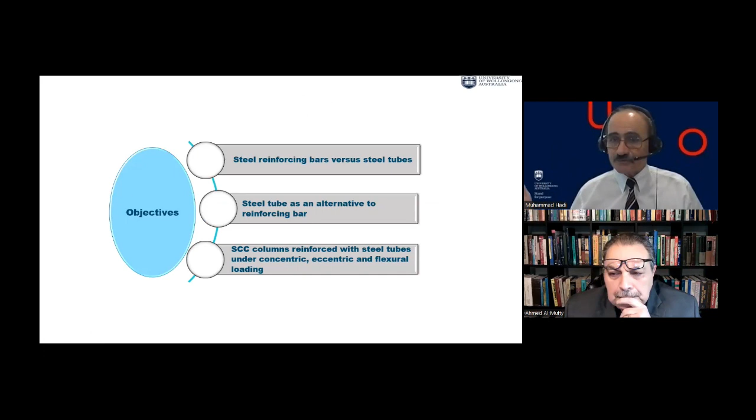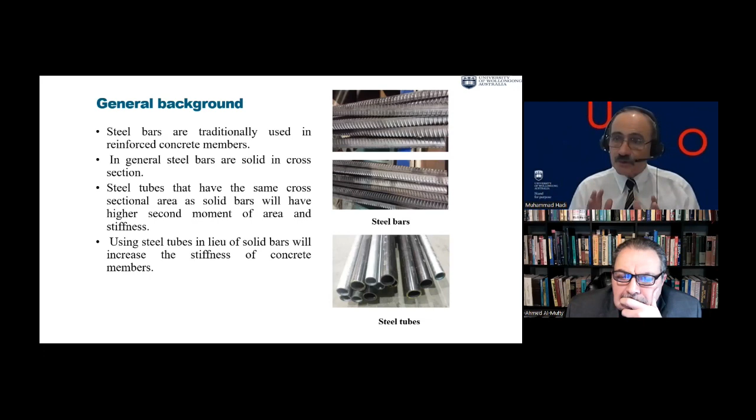Don't worry about the objective. It is using a different type of reinforcement, to see whether it works or not. I don't want to bore you with these details. We have been using reinforcing bars, in tension and compression, for more than 100 years. But the idea here is to use these tubes. Why? The concrete will be confined concrete. When you have confined concrete, you will have better properties: the compressive strength will be higher, and the ductility will be higher. So this is the idea we are relying on.

Now, self-compacting concrete was started about 40 years ago in Japan. So what is the idea? You just put the concrete, no vibration, no compaction. You just put concrete and it flows, and then you leave it for whatever, 28 days, and that's it. So this is self-compacting concrete.

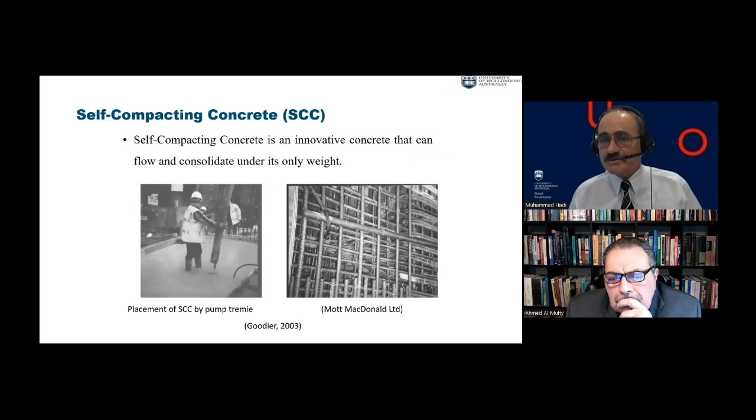And the idea is we will have confinement. I'm not going to bore you with details, but in general, we have ties or helix. Americans call it spirals. It's the same thing, but a spiral, from an English point of view, has a diameter that gets smaller, so helix is the proper term. As you reduce the spacing, the confinement increases, and you will have better behavior in concrete. Is the helical reinforcement also made of pipes? No. So what makes the concrete self-compacting? I will come to that. I'll show you the mix design.

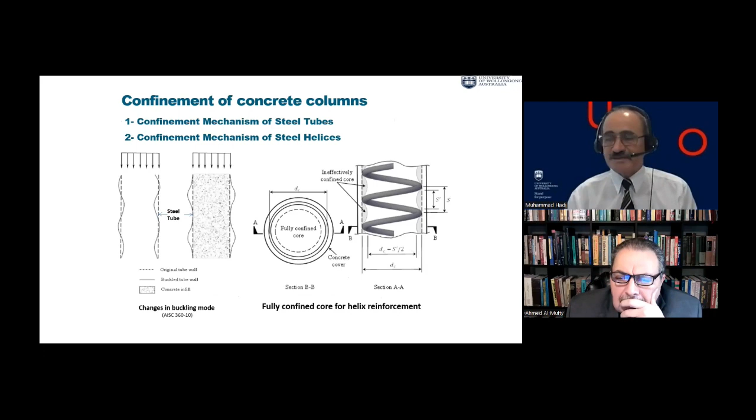Before we start, we do preliminary testing. This includes all materials, meaning the steel. We do all testing based on Australian standard. If there isn't one, we go to ASTM, Canadian or European standards. If there is a standard, you have to follow those criteria for all materials.

This is nominal 500 MPa for the deformed steel, 12 millimeter and 16 millimeters. For the steel tubes, they are 350.

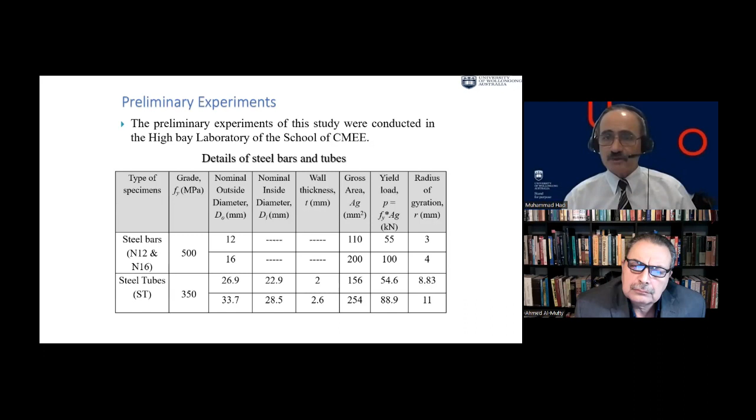So we came up with this idea. How can we come up with this? Again, I don't want to bore you with numbers, I want to tell you about the concept. So we said, okay, let's see what tests we can do on those materials. I will start with the lower two rows.

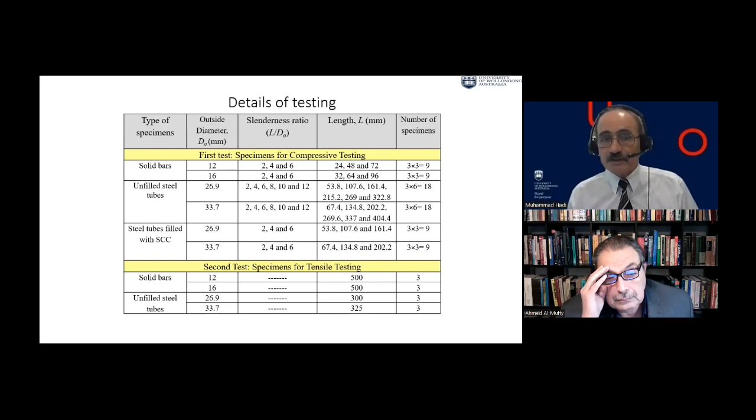These are tension tests - 12 millimeter, 16 millimeter bars for the steel bars. Then compression - for the solid bars, and then for the tubes, both empty and filled with self-compacting concrete.

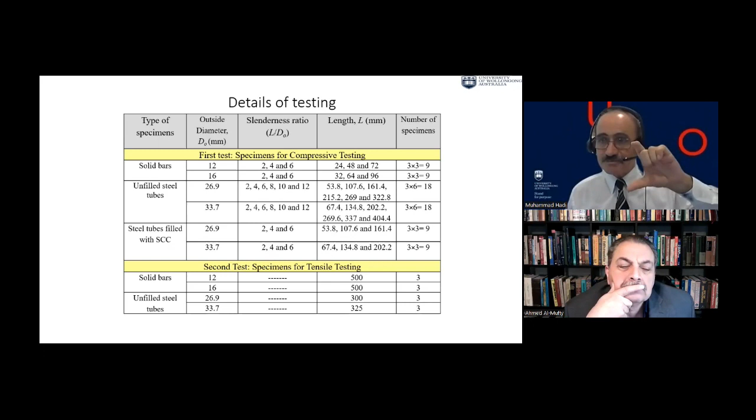Now, in tension there is no problem, you have one length. Whereas in compression there is the problem of buckling, pi squared EI over L squared. Because of this problem, we had different L by D ratios - length to diameter ratio - to see the effect, and we did those empty and full.

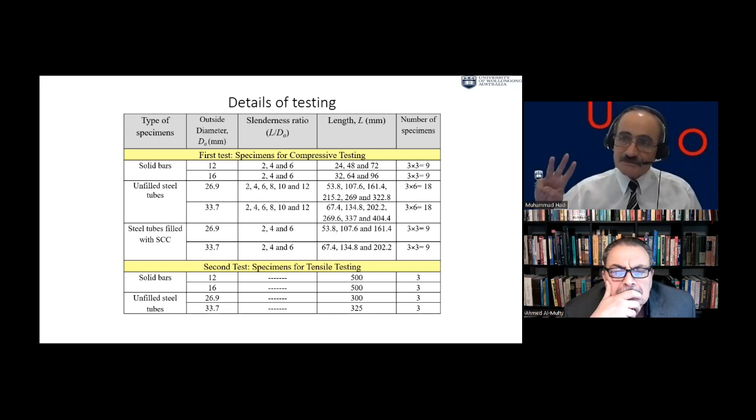So you can see in this preliminary testing the size of the test - maybe 70, 80 tests, and of course we repeat everything 3 times to get the average. So this is the idea.

Now let's go back to self-compacting concrete. In self-compacting concrete, cement is not more - we added some minerals, fly ash and the like. The main thing is the coarse aggregate is small, whereas fine aggregate is large. Coarse aggregate, 10 millimeter maximum - this is what we use because of the size of our samples. Then we had some high range water reducer.

What is that water reducer? High range water reducer, like super plasticizers. We buy them off the shelf.

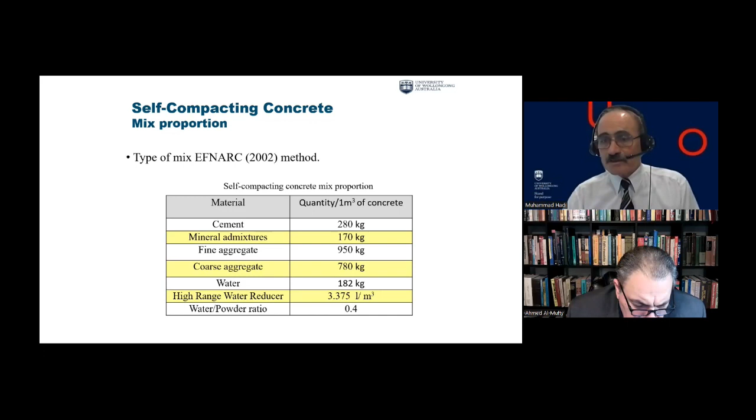So we bought all those, and now you can easily say this is self-compacting concrete. Then I said, okay, what is self-compacting concrete? We haven't started the main testing yet - we are talking about the basics, the materials. How do you know this material is self-compacting concrete?

There is the slump flow test. We put this, leave it, and read the diameter to see the slump flow of the material.

This is easy, but there is more. Why is the slump cone reversed, upside down? The self-compacting concrete slump is like this, not bigger to smaller - it is this way. And there we measure the height, right? With the slump we measure the height, whereas the usual slump measures how much reduction happens in height. Whereas this one is the flow.

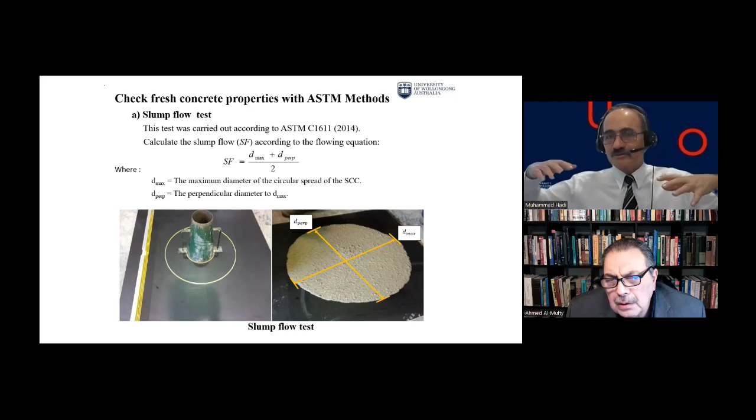So it will flow, we read the diameter. We leave it, and then we read. So this is one test.

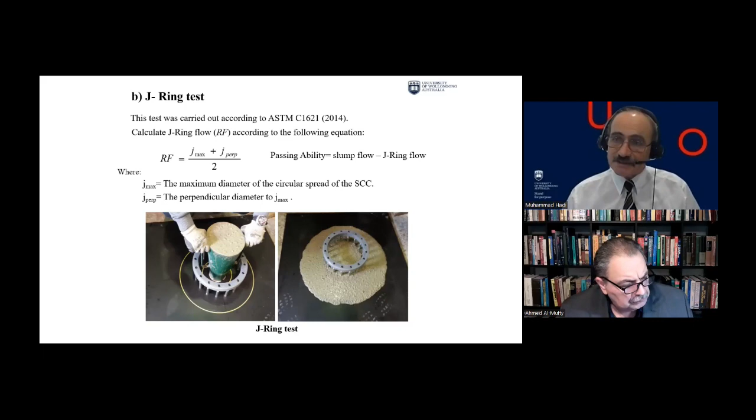The second test - now I will show you. You can see this J-ring. This is what we built, we didn't buy it. We built this from steel, and we put this jig and this J-ring with pins at their diameter, then we leave it and read the diameter to see the passing ability. So this is the second test, to confirm we have self-compacting concrete.

And the third one is column segregation. Again, it is based on ASTM.

Do you use slag like GGBS? We use slag, yes. Normally if you go to shops, there is always fly ash and slag.

Do you do special trials for different percentages to know setting time, strength? Yes, you have guides already for designing? Yes, can I get back to you later on this particular one? But don't forget it. No, I will not.

Okay, I'm interested to show people what self-compacting concrete is and how we deal with it.

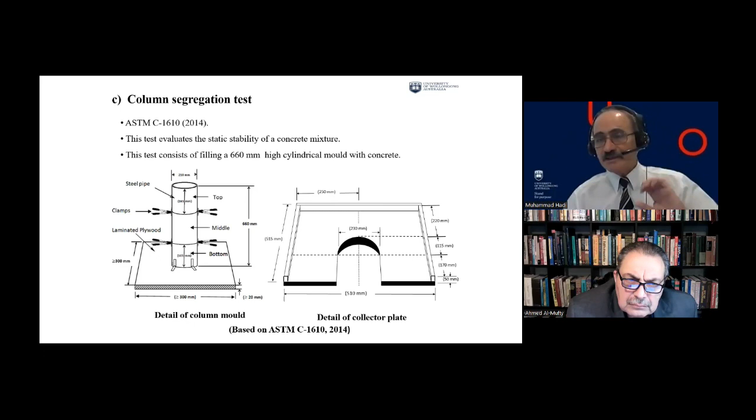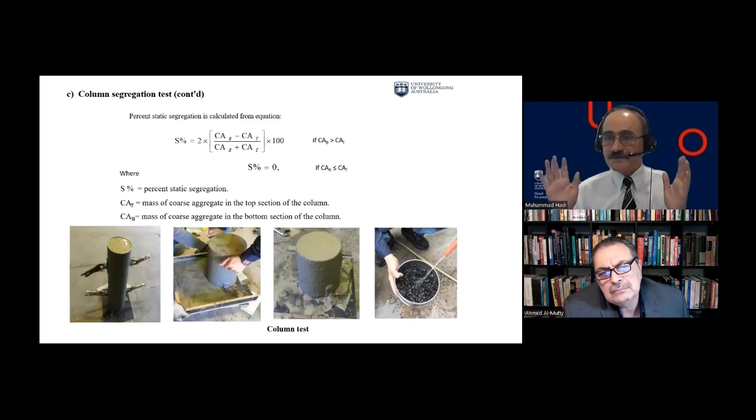So for the self-compacting concrete, this was the mix design. Then we did the slump flow, we did the J-ring, and this is the last test to see the column segregation - again, what we built. This is the work of one PhD student, before starting his work. He did all these tests, and then the segregation test, to confirm it is passing, that it is self-compacting concrete.

So we finished this one. Then we have the compression test. This is normal - we use small cylinders, 100 mil by 200. Why do you use small ones?

Australian standard says 100, or we can use 150. Is it related to the size of the aggregate in some way? No, it is about handling - less material and handling, lighter in weight. So usually in Australia, we use the 100 mil.

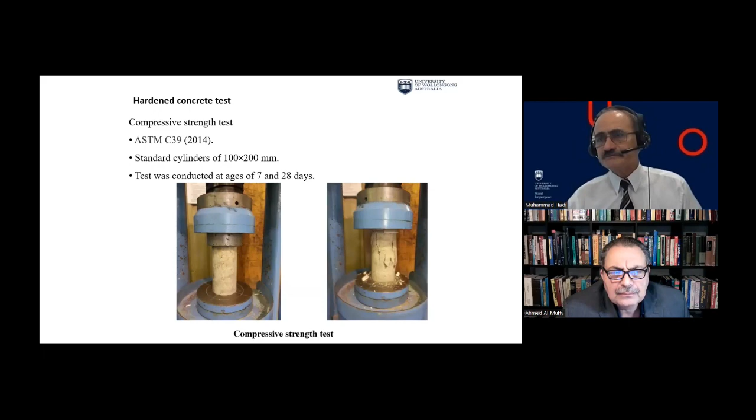Okay, so all this is normal. For the steel bars, what we did, there is something called an extensometer, like a strain gauge. We attach it to the top and bottom. Its length is just over 100 mil, it's in inches, so 101.6 mil. This green part is connected to a data taker, and then it goes to the computer, which gives us the load from the machine - the compression or tension machine - and the elongation for this gauge length, giving us the change in length.

And we can determine the strain. Usually these kind of measurement tools, whether strain gauges or similar, as long as they are checking or recording the change in resistivity, I think we should calibrate them before usage. You are 100% right, yeah.

The first thing I liked in your comment is you said resistivity. Of course, as engineers, when I first used a strain gauge, I asked - what is a strain gauge, what does it do? There is V equals IR, where V is the voltage, I is the current, R is the resistance. But if the length increases, V is constant, I will change - it decreases, and the resistivity increases.

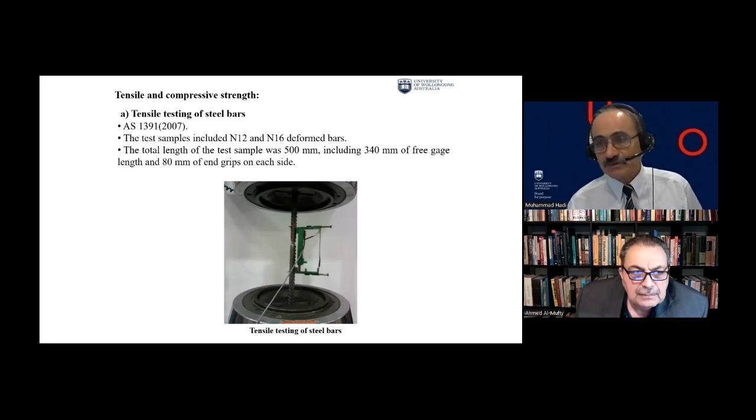So doctor, this photograph shows 2 meters? No, this is only less than half a meter. Okay, but can this machine go longer? Yeah, you can have longer pieces. Now when it comes to bars, it's easy, but when it comes to tubes, if you grip the tube, it will collapse.

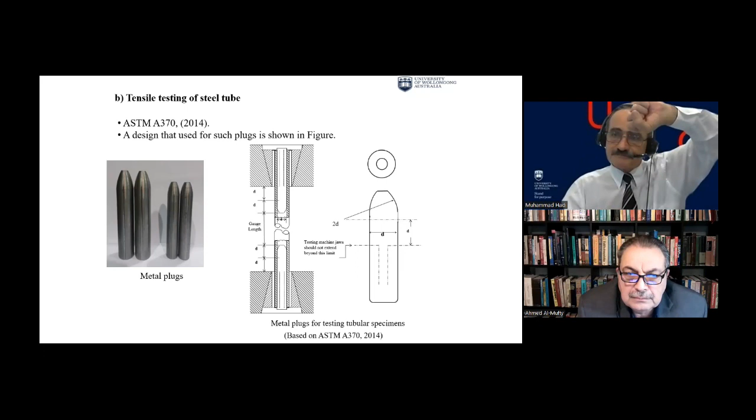So then we went to ASTM, and on the left-hand side you have the metal plugs. We built the metal plugs - we used the lathe and created all those metal plugs. The idea is we put one metal plug at the top, one at the bottom, and then we grip them and test them. It will strengthen the tube at the top and bottom, but in the middle you keep it empty so you get the normal stress-strain relation for the pipe itself. Correct, yeah.

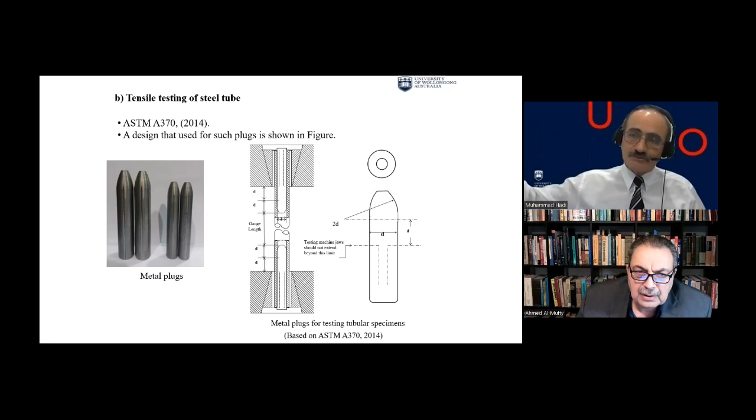So you can see the amount of work the student is doing for this. For compression, it was easy - we tested them in compression at different lengths. You're talking about the pipes? Pipes, okay, compression. No, the first photo on the left-hand side is the steel bar. Oh yeah, that one is for steel bars, yes. Then the second one is steel tubes, and the third one is steel tube filled with concrete in compression.

So this is the steel bars - we put them in compression. That was easy, and you can see, I love buckling.

This is what I teach buckling in second year. I like when you say, I love buckling. I don't love any failure. Well, the worst type of failure is buckling. The second worst. But that's the way we learn, from failure we learn what to do.

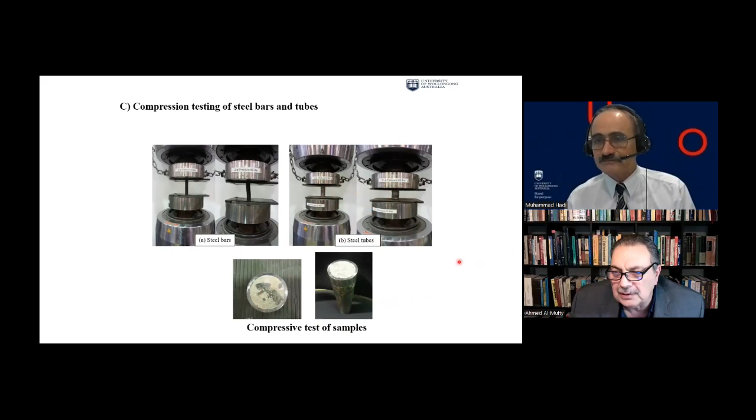You can see here, they call it elephant foot, when the metal starts crumbling - metal elephant foot. So here we tested those in steel tubes, empty, and we did them infilled with concrete. Actually, you will not have that elephant foot when it is filled, right? Correct, yes.

And these are some results. Again, the focus is on the amount of work one PhD student is doing. Remember, all this is preliminary testing. So most of these tests, Faz did them, up to now, and I'll show you more. So this is for tension, for specimens. These are already published.

Now here you can see we are comparing the N12, which is the deformed bar, with the 26.9 tubes. This N is referring to an Australian standard? N refers to deformed bar, but an Australian standard, with nominal tensile strength of 500 MPa.

The N is... you know, we use phi for diameter. We use the capital letter T for diameter, especially in UAE and Saudi Arabia. In Iraq and some other places we use phi, maybe in India too, I'm not sure. In the US we use numbers, so there's a crosshatch for the number of the bars.

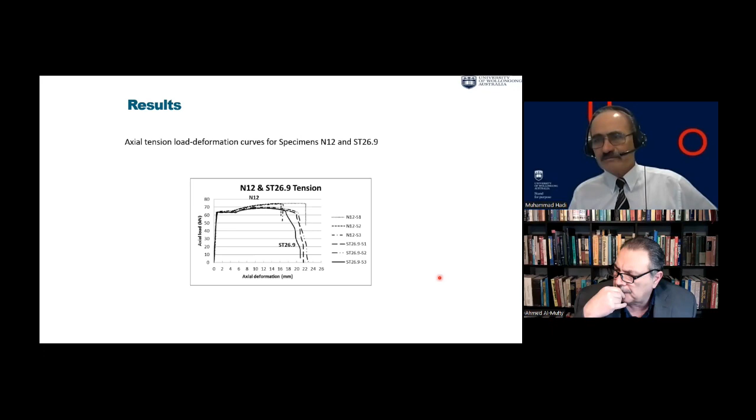So it's not a simple thing to get a specific strength and a specific ductility. Mainly it is the carbon, then other things like copper, nickel, oxides maybe. But manufacturers get used to it because after testing they know the values of the yield strength, which comes with the steel mill, the manufacturer.

But I have to say that for the last 30 years, I'm testing all the steel bars, and always they are above 500, which is good. In more ductile steel, I think you will find the ultimate strength is a long way after the yield - that gives the ductility its meaning.

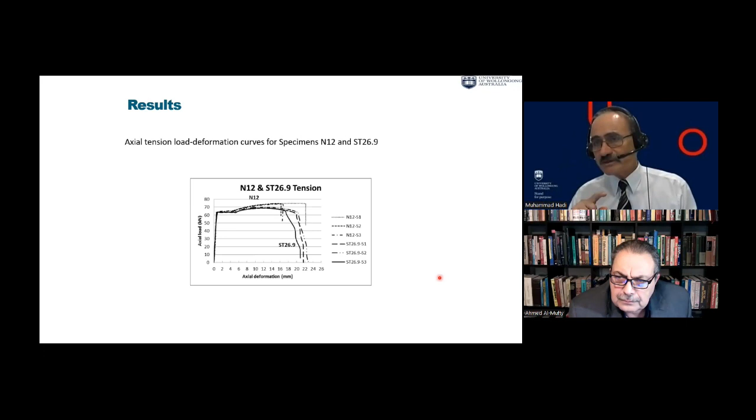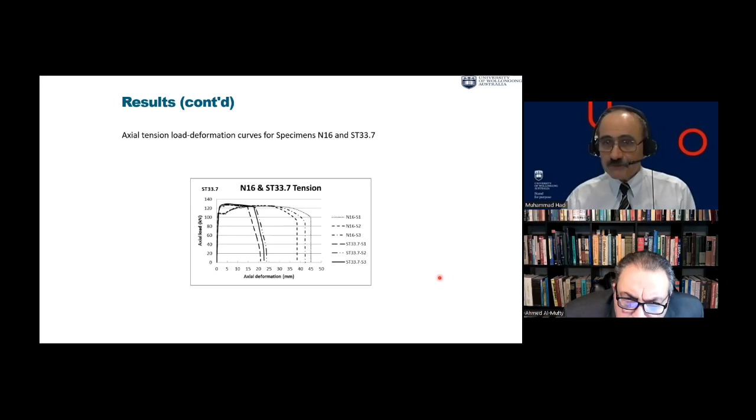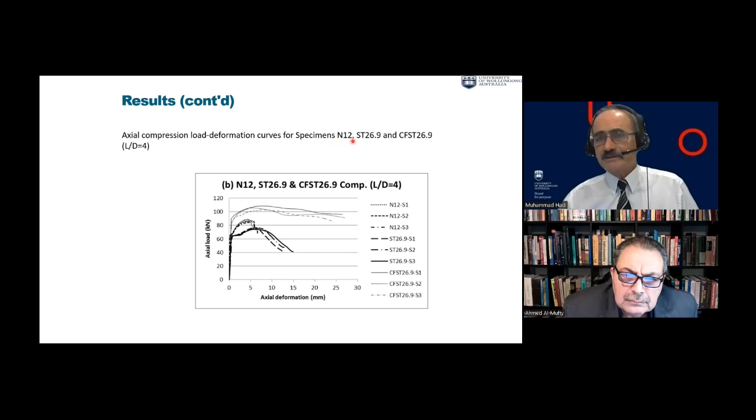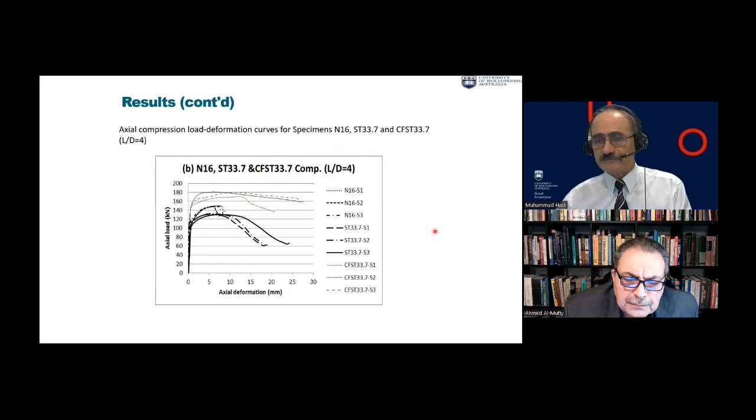Then we continued with testing for the other, bigger specimens. These are also compression tests. This is for, well I don't want to bore you, but it is obvious that as we increase the L/D ratio, we will have less strength. So this is L/D 12, which is this one.

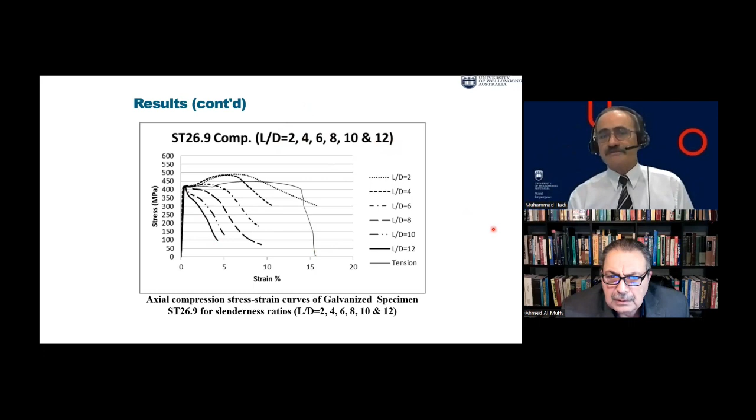You have much less strength. You made compression tests on length to diameter ratio of 12, starting from 2. This usually cannot stand for concrete, but because there's steel this way, this is only steel filled with concrete, steel may hold such length to diameter ratios. Correct. And remember, this is 33 or 26, so it is only about 1 inch, the old system.

So all this I've been talking about is the preliminary testing that Faiz did in preparation. He did all the self-compacting concrete, identified his materials, built the self-compacting concrete testing setup, and built the plugs for tension and compression. So this is the amount of work before starting the PhD testing.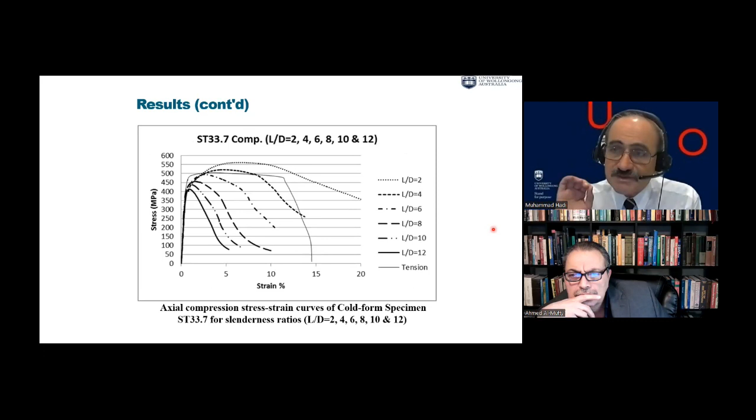Now the testing, Professor, how about the thickness of the pipes? How much is that thickness? The thickness is not much, it is 2-3 millimeters.

Okay, now here we did the testing, I'll show you. Because our compression machine is 500 ton, it is about 1 meter, so we don't test more than 800 mil. So we said, okay, let's test those into 5 groups of specimens.

The first group is just the reference specimen. Here we have the N16, 6 of them, and then R10 - this is the 250 plain bars for the helix, with R10 spacing 50 mil. Then for the remainder, these are all tubes. Ties are the same, R10, but for groups 2 and 3 you have 33.7, 6 of them; for groups 4 and 5, each 6 of them, 26.9. Then we change the helix spacing, either 50 or 75 mils, and the diameter 240.

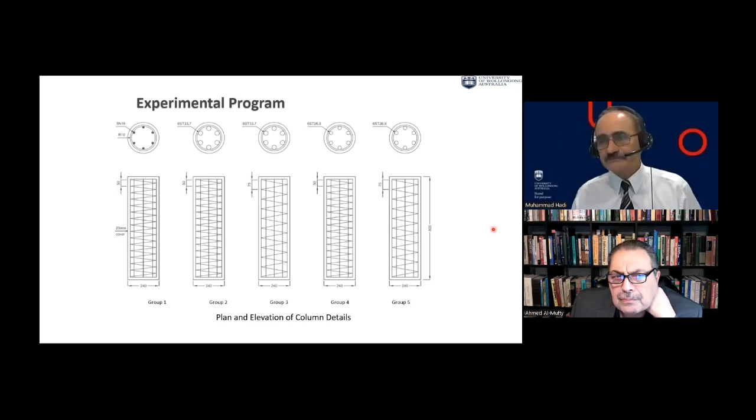And it's 75 because we are using different pipes. So we said, okay, if we go above, what will happen? And the ratio of the longitudinal reinforcement is within 1:4 based on ACI. They are based on - when we are calculating the percentage of reinforcement with pipes, you use the thickness multiplied by the diameter, divide it by the net area times 6, and you can see that in this column.

This column is how we will distinguish in design between designing with deformed bars and designing with smooth pipes. Of course, good question, right? Good question, this one. I will get back to you.

So this is the second one. We have two questions now. Okay, so we have 5 groups, and the first one is just normal reinforcement. Second, the ST, the 33.7, with spacing of helix 75 mil. And the last one, 26.9.

Now, each group of specimens has 4 specimens. The first specimen we tested as concentric load. The second one under 25 millimeter eccentricity. The third one, 50 millimeter eccentricity. The last one was flexural, 4-point bending. So you can see we have 5 times 4, 20 specimens.

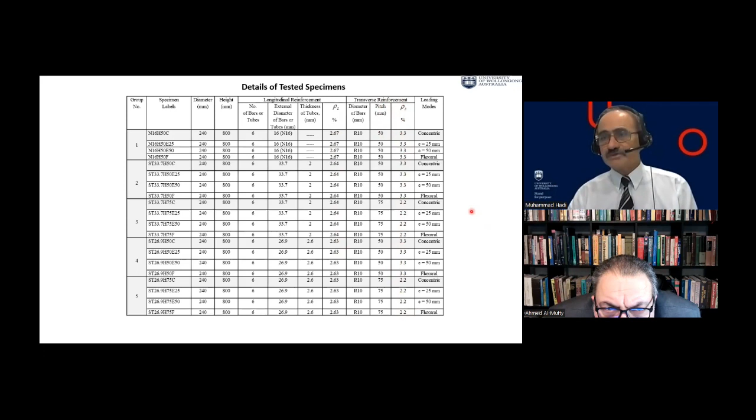Now for the reinforcement ratio, we tried to keep them the same. And for the lateral reinforcement ratio, you can see there is a difference between them depending on the spacing. So we took all those into account. This percentage is by volume, of course, by volume, yeah.

Now I'll show you another trick here. The first drawing here, these are PVC pipes. When we design, we go and see what is available in the market for water or for whatever, and this is one of the constraints: what is available, internal diameter, and we use them.

What is the trick? We take them 6 meters and cut them. When you cut them, you need to make sure they are 100% square. We had a situation before where an apprentice put the pipe horizontally to cut it in the machine, and of course it bent. He cut the pipes almost square, but not quite square. Can you show that part, put your cursor on it?

The point, so here we are cutting it. This one, okay, when it's small I didn't see it. So when you cut it, it is easy. I can cut it, but of course technical officers do it better than me. You have to put it dead horizontal without any movement, so when you cut it, you have dead square. Just a trick. This is easy, timber, easy.

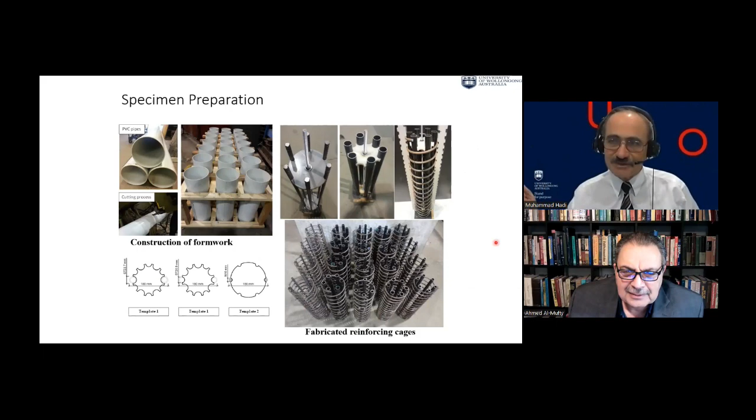I'm showing you a few things which are behind the scenes. It's nice, very neat, very precise. As I said, the man is from Switzerland and he was a watchmaker, so the precision... all our technical officers are toolmakers, so they go with microns, but this guy, no, he wants nano.

Then we placed strain gauges. We usually put strain gauges in the bars. A strain gauge for us is about $10 each, and we tell them, why do you want the strain gauge, what will you do with this? Anyway, that's a different story. We placed the strain gauges on the longitudinal bars, two of them on opposite sides, and when we test them, especially in eccentricity, we know. Then we put smaller strain gauges to determine the confinement.

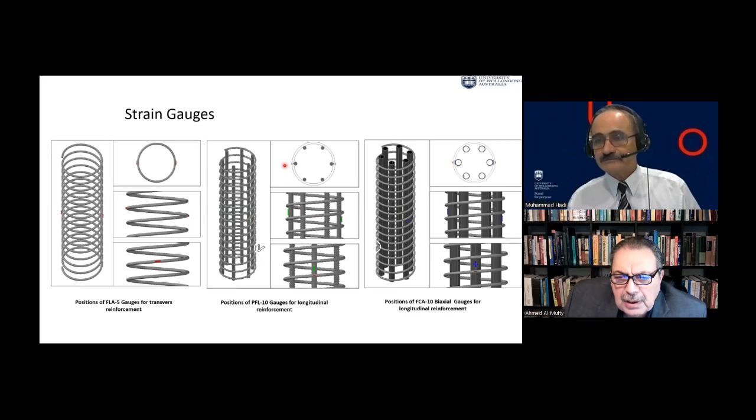Well, here we can see the other one is fine. And the other one, Professor, I want you, if you don't mind, to explain why do you have strain gauges in both directions, horizontally and vertically?

Vertically is easy for two things. If it is concentric, then we can determine the strain in the steel and multiply it by the modulus of elasticity to see the stress in the steel. This is for the longitudinal bars. From this, we estimate the share of the load in the steel bar or steel tube, and the remaining load will be carried by the concrete. So this is for the concentric case.

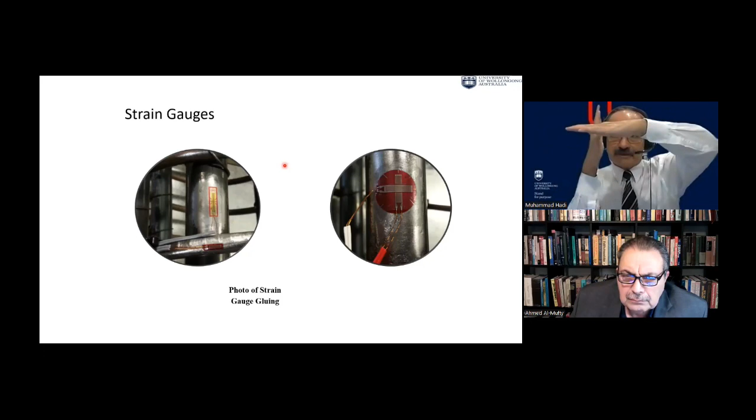Again, longitudinal. For the eccentric case, you can determine the strain at the top and at the bottom. This is eccentric, it will work like a beam, so there will be a neutral axis. You can determine the location of the neutral axis and work from this. Look at it as a beam: we are reading the strain at the top, compression, and strain at the bottom, tension. From this you can see the strain distribution, find the neutral axis, and determine the capacity of this specimen in flexure.

So for the longitudinal case, if it is compression, we'll have the share carried by the steel and the remainder carried by concrete. For eccentric, or flexure, it will act as a beam, and we can see the strain at the top.

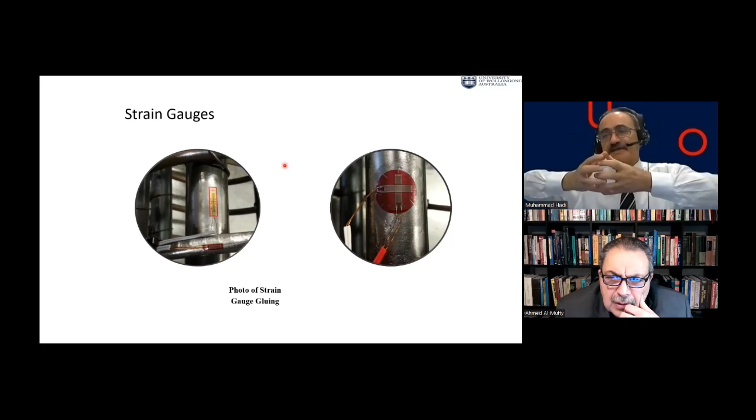At first I thought it's for temperature, but I think it's inside the concrete, and maybe there's no need for temperature here... the temperature changes. But anyway, the whole laboratory should be temperature controlled, at least we are most of the time at 25. For the lateral, horizontal strain gauge, this is for the expansion of the steel, because we have a pipe, it's not normal steel. Correct, yes, the pipe may expand or shrink.

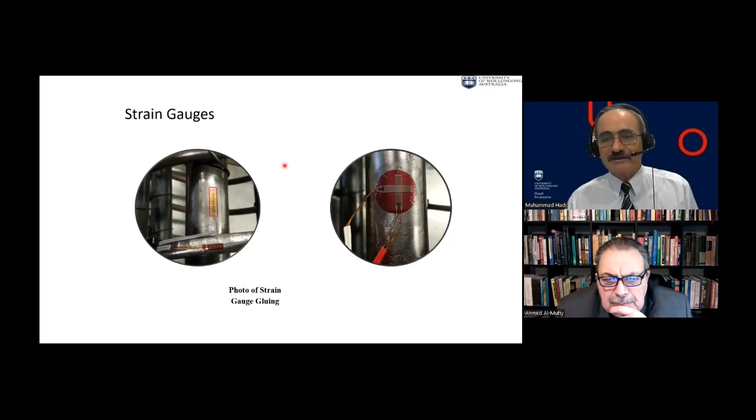After all this, we were able to buy the concrete, so we didn't need to do our own concrete. We did all this testing, and then at the end we bought ready-mix concrete. What we do, these are the empty specimens, and of course we do compression, four-point bending for flexure, and splitting, the Brazilian test. These are the bigger 150 cylinders.

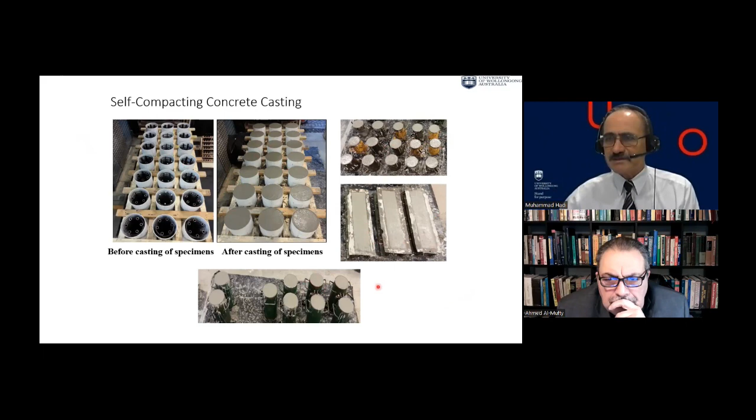And this is what my group has developed to apply. The 4-point bending is easy. So we have all those, we apply the load, and we measure the deflection. They call it laser LVDT. Yeah. They call it triangulation, laser triangulation to measure the distance.

But it looks like you did not do this horizontally. Did you do it horizontally? I mean, the specimen was horizontal. This one horizontal, yes. Then why is it vertical on the side? So because there are 4 specimens in each group. So one of them will be compression like this, and it will be without eccentricity. Then we can move this location. I don't understand. Is this vertical or horizontal?

Okay, so we are talking about column specimens. These are vertical. So it's not related to the other group, which is 4-point bending. So in each group there are 3 that will be tested. They are close. The figures are mixed together. I thought it was explaining the other one. No. So 3 of the specimens will be tested as columns, 1 as beam, and these are our loading heads.

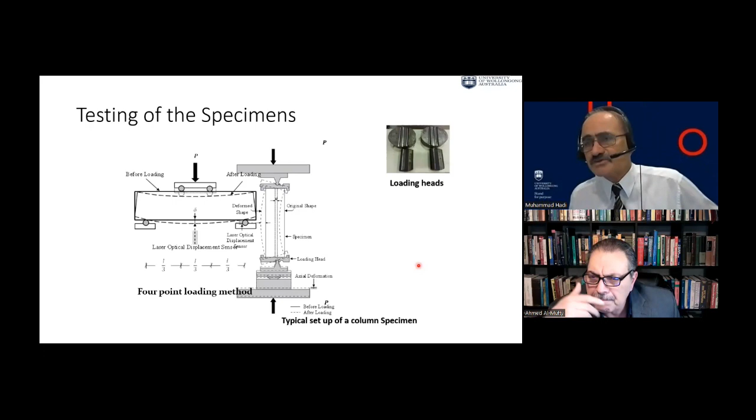What do you mean by first day and last day? I did not figure that out. Because you have 20 specimens, we cannot test them in one day. So you then have a control on the strength evolution at the end of testing, because maybe it's 32 days, or maybe it's 2 months, because it takes time. So by the end of testing we have already reached 56. Sometimes it's 2 months by the time we finish. So you know the strength difference between the specimens at the beginning and at the end. Exactly.

Remember that he's not the only PhD student. So the lab has its own restrictions. There are others using the technical officers, so they queue for testing. For the 7-day and 28-day tests, these are small cylinders, priority, they don't take long. But for the big specimens, every specimen takes 2 to 3 hours testing. They are all displacement controlled.

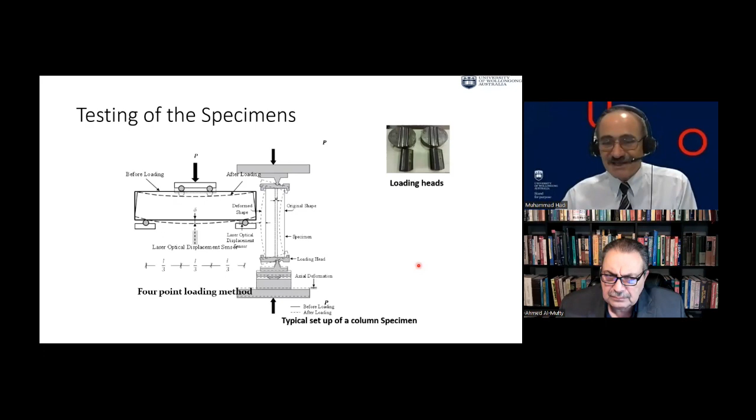And those specimens are 200 to 300 kilograms. So a forklift brings it, makes it square, and they start testing. Of course, it's difficult to hold them by hand. You need a machine. And then you need to cap them with a high strength plaster and leave it in the machine to set, and then you start testing. So it takes 3 to 4 hours each specimen. Anyway, these are the details. No, it's important to know these things, for me and the audience, what's happening behind the scenes.

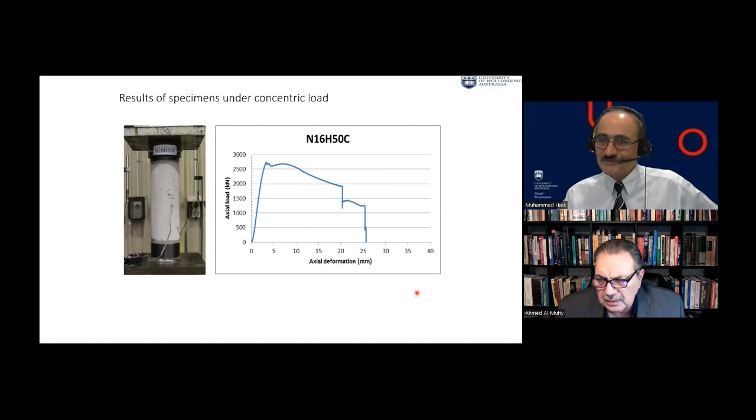So these are the results. You can see the buckling. There's the rupture of the ties, followed quickly by buckling. And then these are the... So that figure was for the pipes?

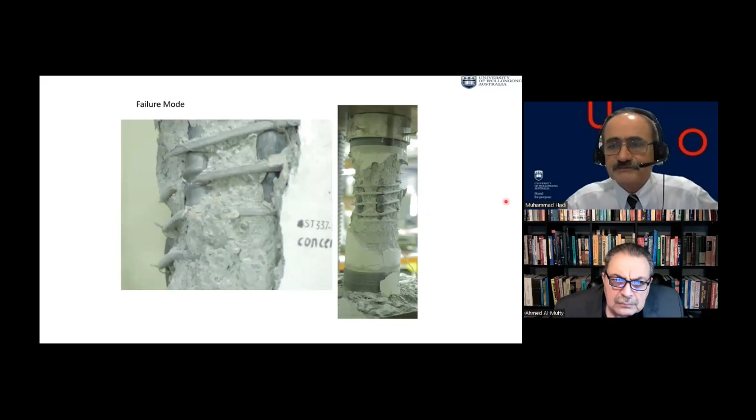Yes. Is this for a pipe? This is for deformed bars. This is for deformed bar. Okay. And this is pipe. And here, there is no buckling as such, but there was tie failure. You can see the tie failure. And we continued. I don't want to bore you with all this. No, I like to see them. It's fine. Okay. So there's tie failure, but less buckling.

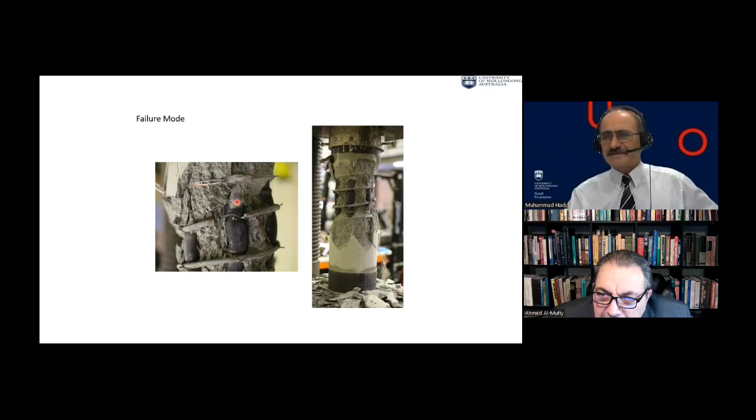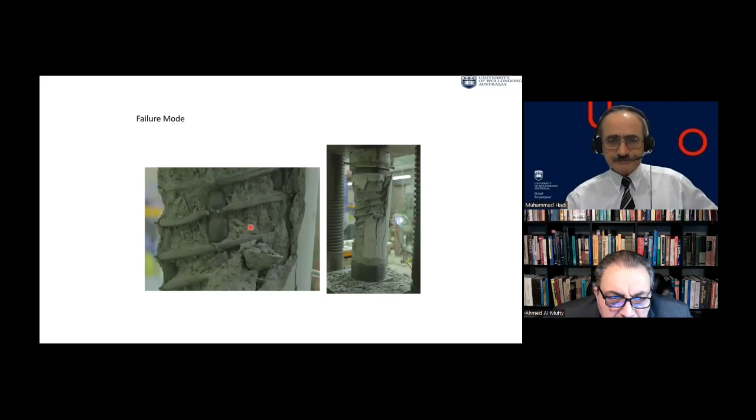These ones are black. You have some of your pipes black and some are stainless steel or what? No, they are all galvanized, but the light. Oh, maybe direction of light. Yeah. Okay. And all those, you can see the spalling of the cover after a while. Here, there is a little bit of spalling, of buckling. And we continued, and these are, again, the tie.

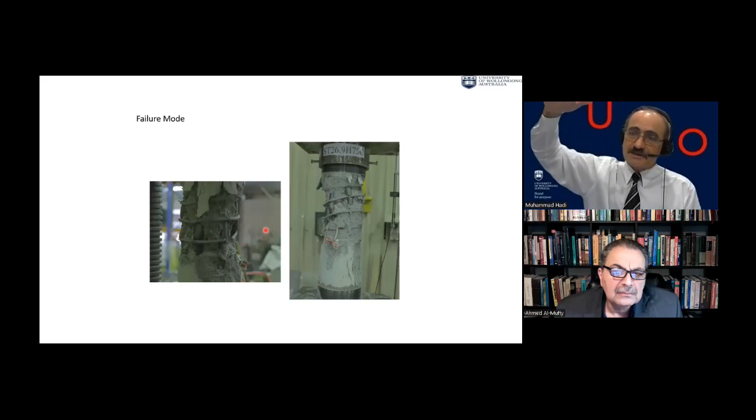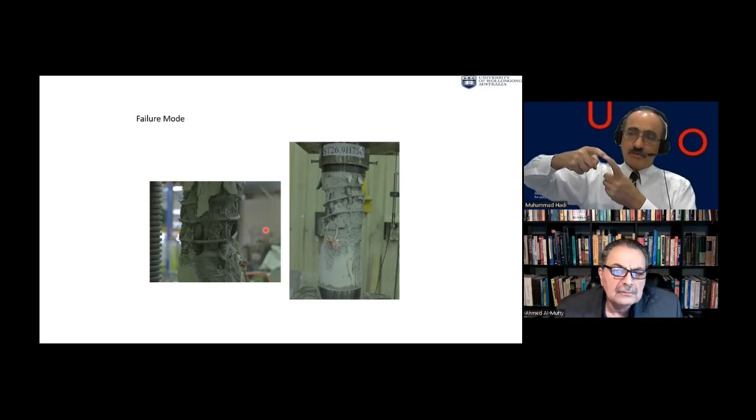Again, from my experience, we had one guy who was a licensed welder, but he put spot welding on the ties, and we had problems. So make sure that when you weld the ties, you weld them properly, because no way you will have the ties for 800 mil. It is very long. So we send it to a company, they do it for us, but then we bring them and we weld the ends. So you need to make sure.

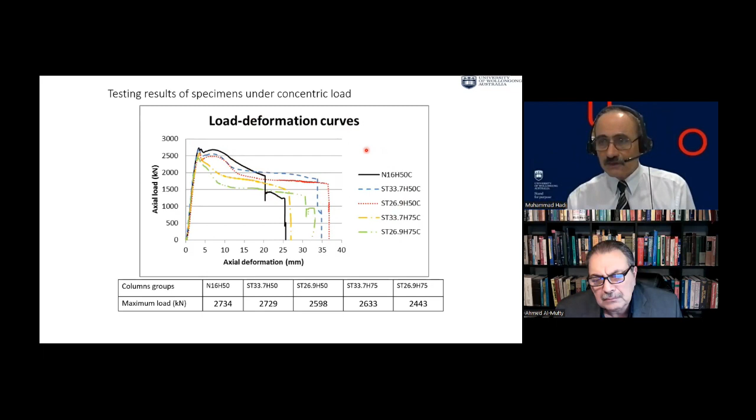And this is the load deformation curves. This is the steel, this solid one. And you can see the strength is almost the same, but what was gained is ductility for the steel ones. These are for the compression, concentric, and these are the failure modes.

Now, I promised Dr. Mufty two things. The first one, now I'll tell you, of course, there is more work I didn't show you.

It is getting 5 p.m. my time, and I think it is 3 a.m., Ahmed, in your time, 2 or 3 a.m. I'm enjoying the presentation, so okay. I don't know what time is it now. Yeah, it's around 3 a.m. It's fine. Okay, sorry.

So this is the failure. Now, we had a problem, and I will tell you about the problem. Bond. There was failure in the bond. So what we did, we had to dig the concrete and add washers and weld them. And then add concrete, wrap with FRP and test. So now it is in my database. Bond is important.

Now, the second thing that you asked me, Doctor. This was the answer for the smooth pipes. So the smooth pipes. Yeah. The second one is about the self-compacting concrete. Self-compacting concrete. We played with the self-compacting concrete, and ultimately we didn't mix the concrete in the labs. We bought the concrete from a company.

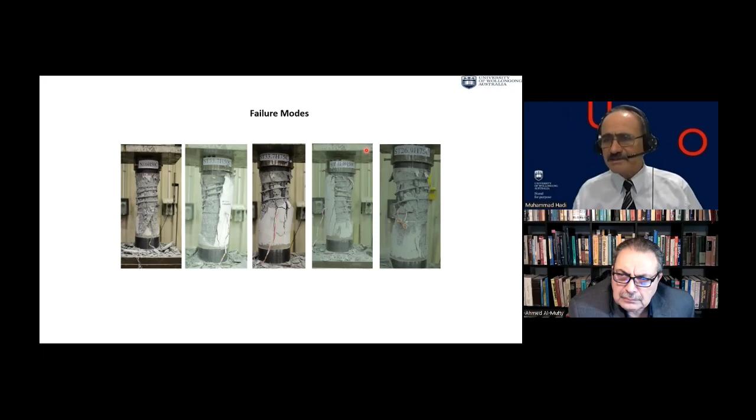The problem with concrete, of course, what we do is the Brazilian test, the splitting test, an indirect test. And I was surprised because when I was doing my PhD in the 80s, people were working on it, the gripping of concrete. The problem is gripping of concrete. So this is what they came up with.

And in effect, they put some bars and they welded pins on them. So this is one. And in order to ensure that the failure is in the middle, they put notches. They are 20 by 10 notches, prisms. And they put all those. And this is all the detail of the pins.

The problem is, because you are dealing with material which is very weak in tension, there are some problems, and we wanted to have perfect alignment. So we built universal joints, and those joints will adjust themselves. And you can see we are testing in the same machine, the 2-meter high machine. And we put those and we tested them. We published this work in Construction and Building Materials. And then we said, okay, let's send it to ASTM journal to tell them that we have this, and we actually published it there.

It's really interesting. I would suggest that somebody should do some finite element analysis for crack propagation. Yes. Stress concentration in the, what did you call them? Notches. Near the notches. The failure was good, because you can see that at the universal joint. Can you show the other slide, please? This one. Yeah, these 3 pins. What do you call them? Pins. We just took small bars, and we welded them.

These pins will concentrate some forces on the concrete. They will. But our estimate is it should be negligible compared to the strength of the steel. Remember, this is 250 MPa, and concrete is maybe 5 MPa. I'm not worried about the steel. I'm worried about what's happening in the concrete in these areas. Yes. But because of the notches, we are forcing them to break there. The area in the middle is smaller. That will cause the stress concentration to be there.

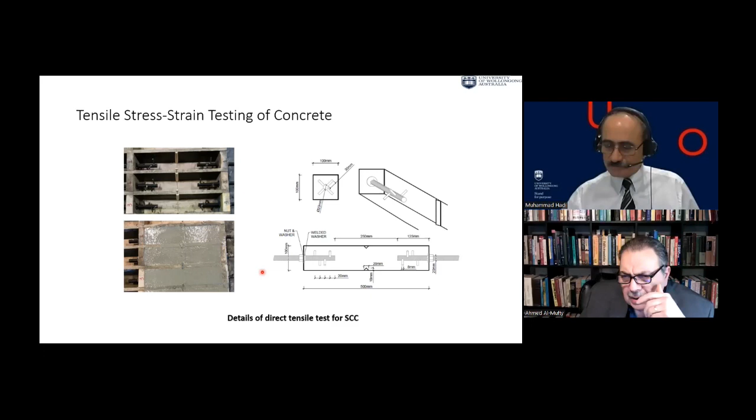And how much? Can we know? Less than 10%. How much is the tensile strength? About 10% of the compressive. So it's in the same trend. Roughly. But we have all the stress-strain relationship in tension. When splitting starts, it will happen immediately. There's no time. Of course, we test them under displacement control.

I just want to add one thing. We do 7 days, 28 days, first day of testing, last day of testing. Each of those, we do 3 samples in compression. But at 28 days, in addition to those 3 samples in compression, we do flexural tests, beams in 4-point bending, and we do splitting, 3 of each. So we have the proper material testing at 28 days.

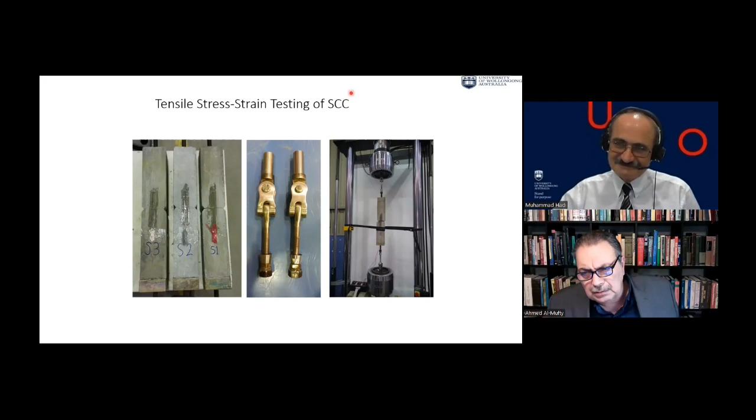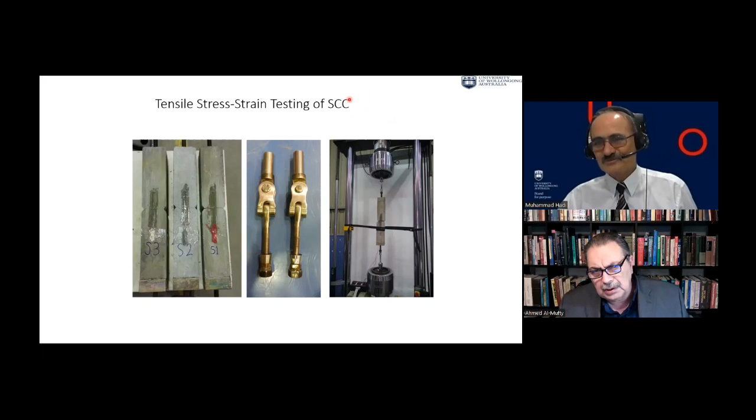Very good. Any other questions? For me, what I'm interested in is the approach, and also we identified the materials: what is confinement, what is self-compacting concrete, what is the steel tension test, what is ductility. A lot of things we have learned through this presentation. Whether or not the specific topic of the PhD research is of interest to engineers everywhere, it's a very interesting topic, and I think we learned a lot from your presentation today, Professor. Thank you. I hope this shows the amount of work in a PhD, and it's representative of Wollongong University.

We would like to see you again on this channel. Yes, of course. But this time I would like to have you on a theoretical or practical topic from the engineering syllabus. No problem. We started with the PhD research, and that's fine. Next time let's talk about, for example, buckling, or pressure vessels. I remember you were specialized in optimization. Yes, optimization is still in my blood. I had 3 PhD students work on optimization. That's also a nice subject, using optimization for specific topics in civil engineering, linear and non-linear, and how we deal with constraints. We should teach ourselves and people some theoretical ideas next time. Of course.